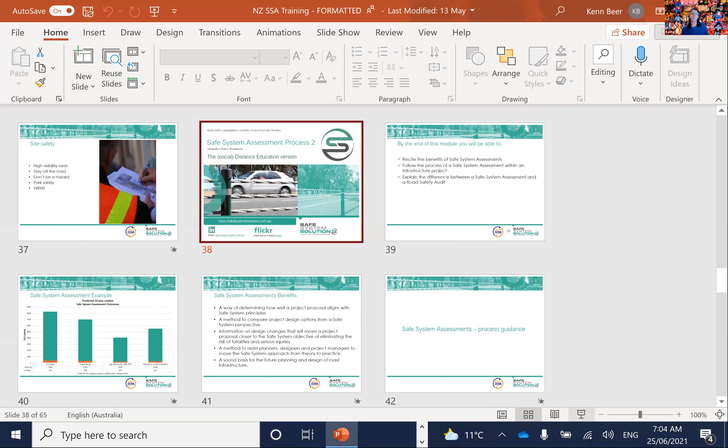Thanks, Kathy. So I will get started. I suppose we've called this one sort of process two, associated with safe system assessment, but a little bit of policy guidance as well.

We're going to talk about the benefits of safe system assessment, some independent evaluations that have been done on a number of safe system assessments into how effective they are. So I'll take you through that.

Generally, safe system assessments within an infrastructure project, and I'll explain the process that industry seems to have adopted, and a bit more on the difference between road safety audits and safe system assessments, because that's a very common question people ask: why do I need to do this? We do road safety audits as part of the project, or we're going to. What's the difference? Why is there any use?

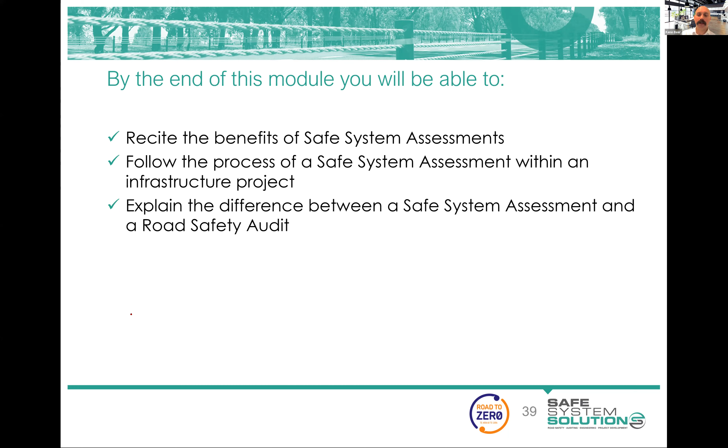I actually want to start with this diagram. There's a lot in this, so I'm going to spend a bit of time on it.

This is a chart from an independent evaluation. Blair Turner, some of you might know, a New Zealander actually, was engaged to do an independent evaluation of the first 35 safe system assessments undertaken in Victoria on major infrastructure projects. These are really big infrastructure projects - we're talking town bypasses, major freeway upgrades, really big stuff. So 35 of those.

What we did was basically use a crash prediction model. Crash prediction models being things like ANRAM, IRAP, IRR, or the like - they take the attributes of a road, relate those to research knowledge, take the crash history of the road, pack that in there, and are able to predict fatal serious injuries going forward based on alterations to that.

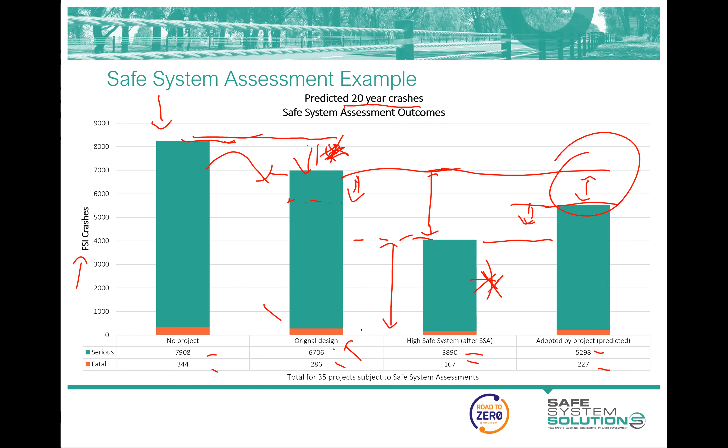We've got another question, Ken. Is there any cost-benefit comparison about this study? That's a really great question, because cost wasn't really looked into in this study, although I suppose it could be done. There were a couple of interesting examples when I looked at the 35 cases evaluated. Some were from Safe System Solutions, some from other consultancies, and a few done internally within different Victorian government departments. My take is that most of them had extra cost for the project, but it was small, not huge differences in cost. A few had lower costs while getting better alignment with safe system principles.

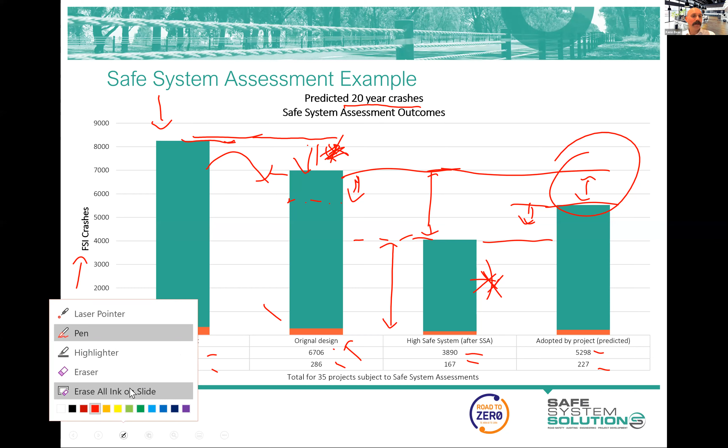One stands out in my mind very clearly, which was a bypass of a town. Essentially their cross section involved a 12, 15 meter median, then a lane, a lane, a massive clear zone, and another lane—this was a sort of greenfield bypass. The sheer amount of land they were going to need to acquire, and the vegetation removal, was huge.

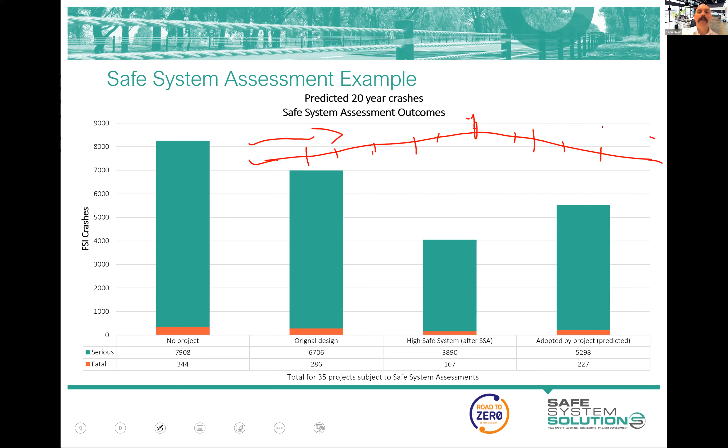And even just the earthworks and the cuts and things were big, and so this was because they were really going at that massive envelope. The safe system assessment said continuous barriers is going to be the go anyway, so you can bring everything in, barrier here, reasonable offset of 4.5 to 5 meters, and then your lanes brought everything in, and so you really narrowed the whole cross section, the land. I'd dare say it would save them many millions of dollars on that project to get better alignment.

So it's not always the case that it costs more money, but I will agree that in most cases to get from here down to here involved bits and pieces more - continuous barriers, maybe intersection forms that were a little bit bigger. But I don't have a dollar figure to that.

Other questions or comments, Ken? That's all for now, Ken. Thank you.

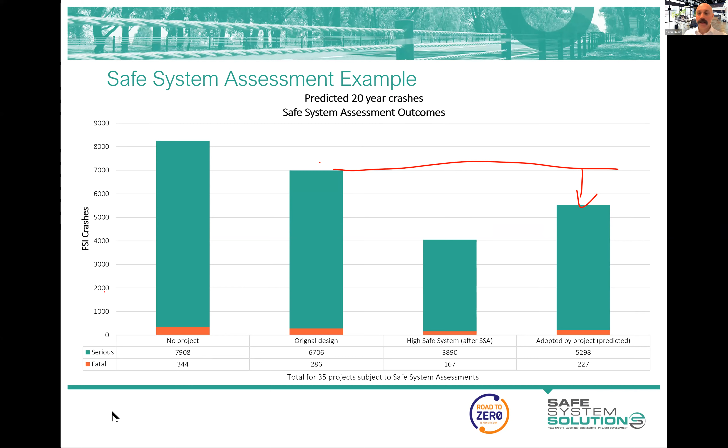Yeah, so I think that's something of interest, and there's certainly a couple of published papers on it if anybody needs to use that. It'll be interesting to collect a lot more. This was done about 4 years ago now on some early projects. It'd be interesting to see that after some time rolling safe system assessments out in New Zealand.

All right, just a few dot points of benefits of safe system assessments. A great way of determining how well a project aligns with safe system principles, as you're discovering. Good method to compare design options.

That's something I really like, in the sense that a road safety audit was never that thing to compare project designs. You'd identify issues with each design, and sure, an auditor may sometimes help with opinions on which is better, or maybe that provides some information to project managers to help make decisions when they've got options on the table. But this is a really clear way of doing that with some scoring.

And it's very much something that looks quite impressive, in the sense that if their traffic modelling has been plonked on the table, the big juicy traffic modelling report with level of services and lots of numbers and things like that - that was often put down on the table, and there's almost no questioning of it. You go, well, that's what it said. I mean, yes, the traffic people might have a little bit of debate about specific little things here and there, but it was generally, that's what the traffic model said.

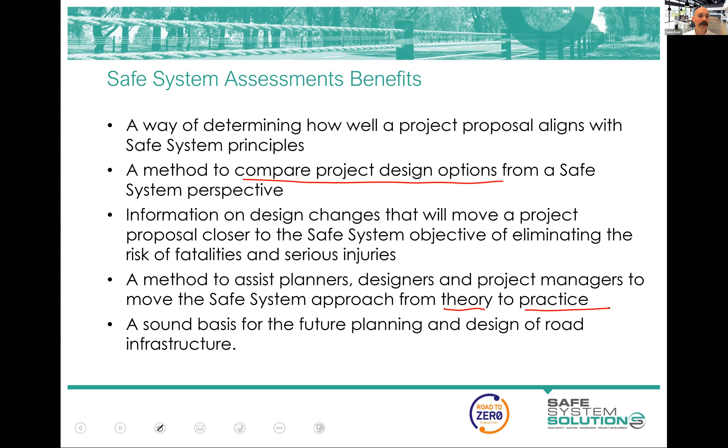Okay, so let's go through this process. You're managing an infrastructure project, and where are we going to be doing safe system assessments? This comes into sort of what was mentioned earlier - the safe system assessment is best done quite early in a project. I personally like to see some lines on paper and enough detail to understand what's happening, but the principles can be applied very early on.

Once you are into the details of a project, though, like you've got a detailed design, the safe system assessment isn't the greatest tool. It still scores, and you do your scoring, you can show how good things will be - that can be an advantage. But when you're starting to make recommendations on fundamental intersection form and big decisions that were made back earlier, you've got no hope of making these big changes. You're locked in. The project's locked in.

We have done safe system assessments on the big 500-page design set with the full works - drainage, plans, lighting - and then made recommendations that the intersection forms should be completely changed. And you think they were changed? Of course they weren't changed. They wanted to get this out to contract and were told that they had to do a safe system assessment, and they did not want any of that.

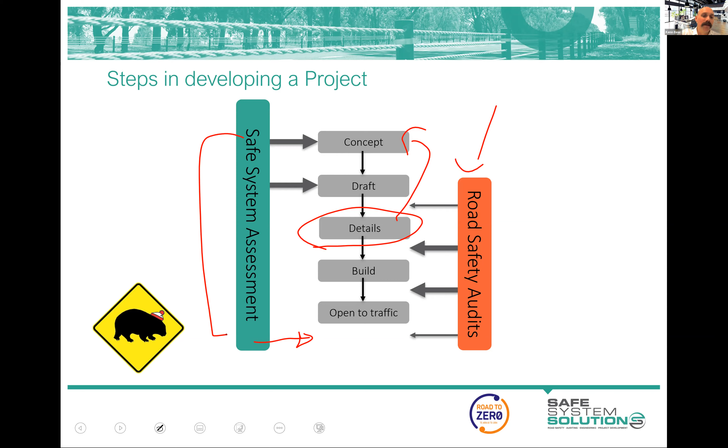The few differences between a road safety audit and a safe system assessment - and this is evolving over time - both of them look at issues that impact the likelihood of crashes and do them really well. Issues that identify the severity of crashes, I would say road safety audits should always, and it's certainly part of what is required. The New Zealand process guidelines for road safety audits talk about severity.

A little interesting quirk on New Zealand's process is you talk about the likelihood of severe crashes, so you have to get your head around that, because it's likelihood by likelihood - the likelihood of the crash happening and likelihood of it resulting in death or serious injury on the other axis, which is your risk matrix used in road safety audits. It's fine, but it is saying severity is important. But what we often find is that auditors in practice are sort of ignoring a high energy crash because the likelihood has been reduced to what in their mind is acceptable, if that makes sense.

The absolute classic is the signalized intersection, where the auditor is talking all about sight lines to the signals, the use of LEDs, whether mast arms are required, line marking, advanced warning signage, and everything like that - all great, important stuff, but sort of ignoring the fact, subconsciously I would say, that when that red light is run and a crash happens, the severity of that crash is going to be bad. But I'm hoping at some point soon we'll be able to give that a tick as well.

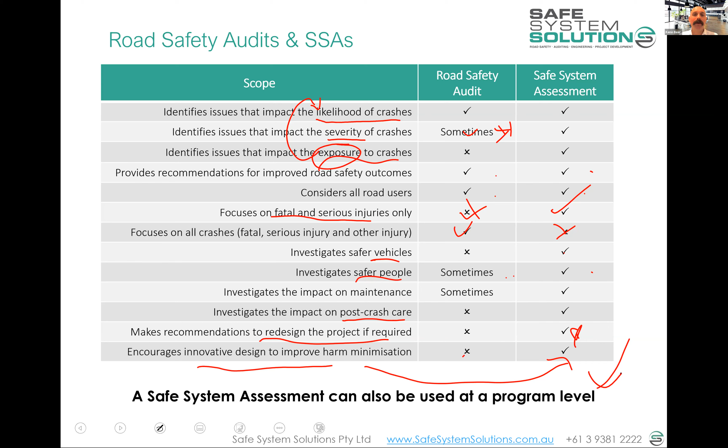It is an elaborate risk assessment methodology. Well, maybe not even elaborate - it's just a risk assessment methodology. Some questions and comments, please.

So Mark says, thinking about comparing designs, we very often have to compare against several objectives, and safety being one of them. So you can see how safety does get diluted throughout the process. Yeah, yes, and I think we're always going to fight that. I, of course, see the world only through a road safety lens. That's all I do.

But I do acknowledge that there's people who only see the world through an environmental lens, or only see the world through a traffic operations lens, and so we do have to be aware of that, and we're going to continue into the future to do multi-criteria assessments of infrastructure projects, and our funders are going to holistically look at the benefits of projects all round. But this does give us a pretty good tool as we go into that debate and challenge.

And I think just the way it's laid out means that safety hopefully goes up a few notches in its consideration. But we've got to be realistic here - it will be one of the considerations. It should be safety first, and then we'll work out the rest of it. But likewise, my environmental friends will say protection of the environment is first, and then everything else can come in under.

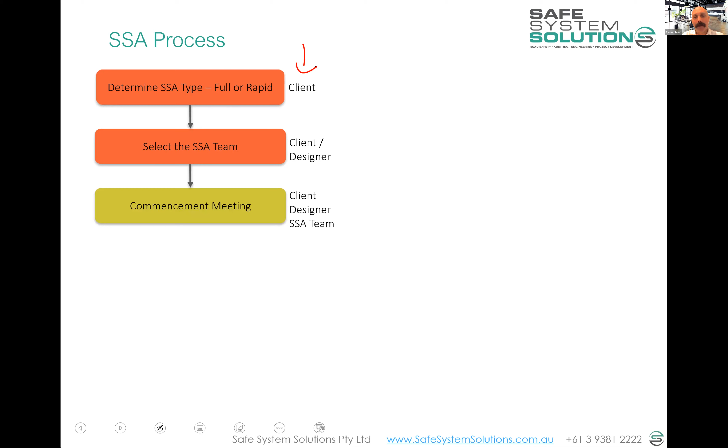Then there's some sort of commencement meeting with the design team and the safe system assessment team. That commencement meeting is really about understanding the project, the context, and the way things are going to be done, and that feeds into those recommendations and getting them aligned with what they're trying to achieve out of this project.

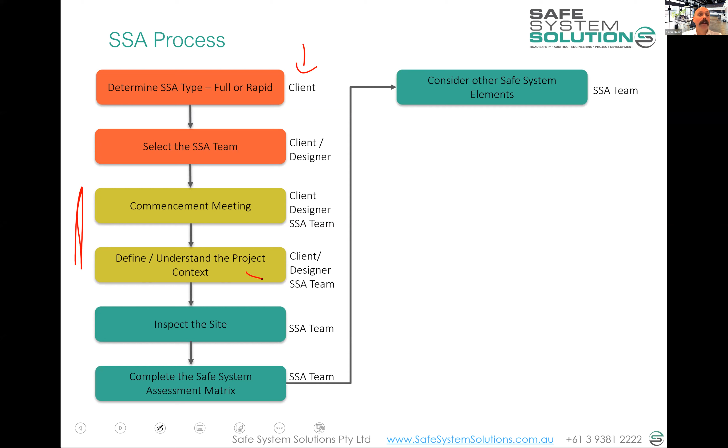There's a look at the plans and the designs, and then there's a site inspection. Completion of the safe system assessment matrix. Consider the other elements of the safe system, through the prompt questions and anything else you might think of. Identify treatments to improve alignment with safe system principles based on the existing design. And then you write up the report using some templates that are available.

That's handed over, and the clients then go through those recommendations and respond to them: yes, we can do this one; we can't do this one; this one's interesting, we like the idea but we're going to alter this bit, whatever they're saying. That doesn't need to come back to the safe system assessors, but it's a nice thing to do. And then the design is amended and these changes are incorporated into the project.

Now, if there's no intention to do any of this, then really you've got to question why a safe system assessment is actually happening. Maybe it's just to see which of the existing options has best alignment, but even still, you want to be able to take the best one, or whichever one you end up with, and understand how you can make it better.

So we really do want to see some change happening with this. And if not, it's starting to drift into tick box territory, and we don't want to waste the resources and energy on that. I'll be very disappointed if it becomes another tick box exercise.

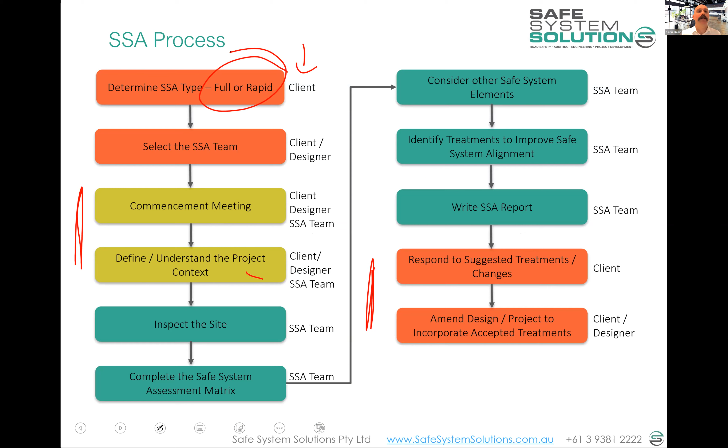Thanks, Ken. We don't have any questions on the process at the moment, but we have a question about crashes. Is there a separate assessment of national statistics of contributing factors to fatal serious injury crashes, or is it sourced from the police and coroner reports?

So there's quite a lot going on in that space. A huge amount of research goes into that, and you've got some wonderful research organisations in New Zealand working on that sort of stuff. You've got great human factors people doing research continuously, universities and the like, constantly putting out reports that look into these factors.

There are naturalistic driving studies, which essentially involve fitting cameras in cars and letting people drive the streets, gathering intel on factors often associated with behaviour involved in crashes. We've also got a lot of vehicle research, analysing the types of vehicles involved in crashes, going historically through databases and VIN numbers, and comparing that to safety features and those sorts of things. There's continual work happening around understanding speed, speed limits, and operating speeds on roads and how that influences crashes.

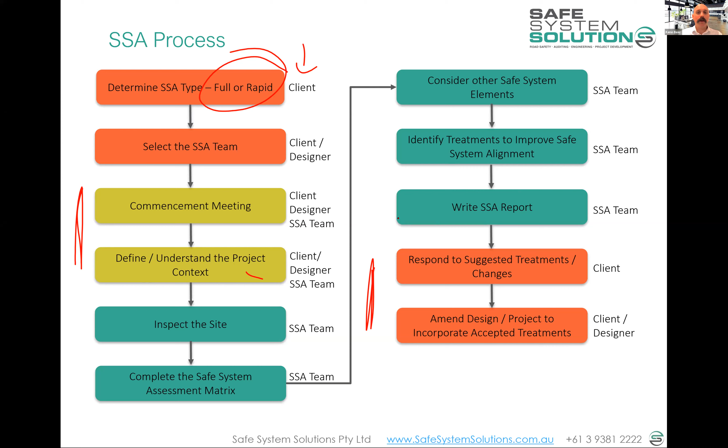Just to point you at what's happening in some other jurisdictions, I'll start with Victoria. The Safe System Engineering team in the Victorian government has produced quite a few resources - the guidelines we provided follow the Austroads procedure but add more detail and clarify a few things. The rapid and full safe system assessment templates are available, and those are what people tend to follow.

What I gave you as your template was the rapid one, but the Victorian government said please use these, rebrand them, copy everything - just try and get a bit of consistency in what's being produced, which I think is a great thing.

The Victorian government also publishes a list of recommended safe system assessors, and this is the pathway for getting onto that list. You show an interest in this sort of work, complete a course, get some real world experience, and then submit a safe system assessment which gets reviewed - either you get put on the list or they give you feedback and you can have another go or resubmit.

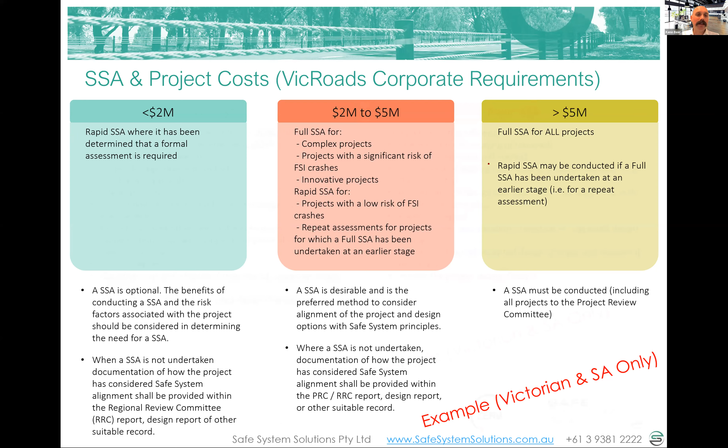I'll now cover what's in a full safe system assessment versus a rapid safe system assessment, then take some questions. Queensland calls the rapid a 'light' assessment - I think they spell it light, not lite. It's called rapid in Victoria and South Australia. A full safe system assessment includes the commencement meeting, the background and context, and the workshop.

It's said optional there—that's where you're in the room with, or online with, the project team and the designers, talking about why they've done different things. The reason it's optional is because some projects are quite clean cut, or the assessors know the context of the project quite well.

So anyway: site inspection, existing conditions matrix, then all the design options get their own matrix, just as you're doing in yours. Other safe system elements, design changes are recommended, then the full reporting, and then obviously they take on any changes they can, and rescore if necessary.

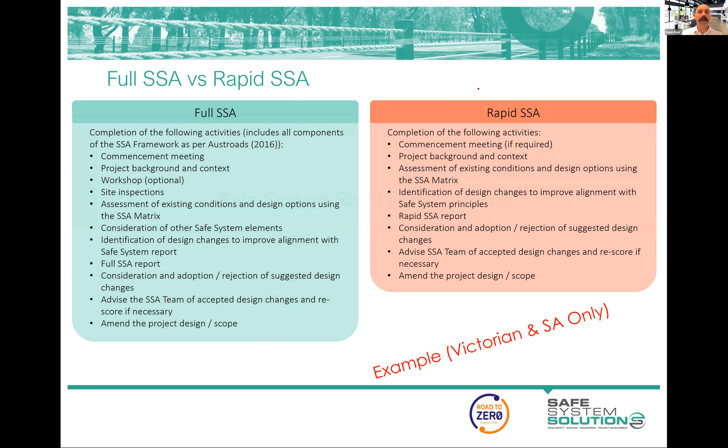So any questions or comments before I jump into some different road stereotypes, road environments? Shall we have a chat about that?

Yes, thank you, Ken. Lots of good thinking happening with this group. So the safety and health outcomes, such as physical inactivity and vehicle emissions of transport projects, both impact on disability adjusted life years. Is there any framework for assessing health and safety at the same time?

Not that I am aware of. Important stuff, but I don't know enough about that. I would hazard a guess there's lots of people who have different tools and models to assess some of this stuff—I just don't know of it. I'll be welcoming anybody else in the group to jump in and let us know of anything in that space. Sorry, I'm not much help there.

All good. Can you tell us about whether the VicRoads SSA and project cost criteria meets the Waka Kotahi funding requirements? Might need some more information about that one. Hold on—funding rules in New Zealand require an RSA to be completed at all stages of a project, or an exemption provided. Yeah.

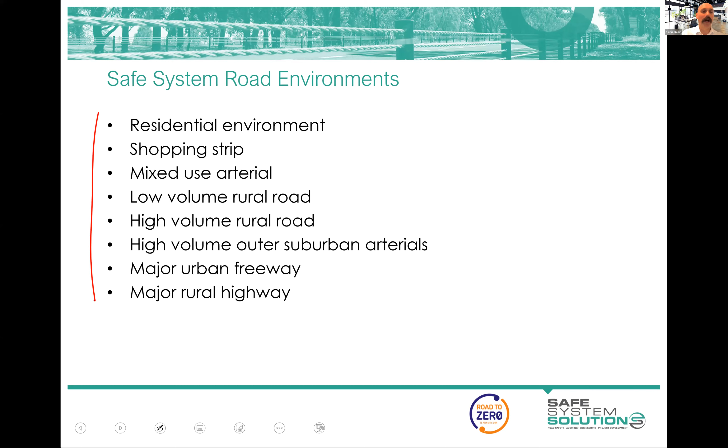Now type in a few ideas on things you can alter in the road environment to improve alignment with safe system principles. And like always, tell us whether they'll influence exposure, likelihood, and/or severity. I'll give you a second to do that.

I'm just going to jot down a couple of ideas, and the first people to put in these ideas win a prize. Not to say they're the only things or the best things, just a few I'm going to jot down. Because I realised I hadn't given out any prizes yet today, Kathy.

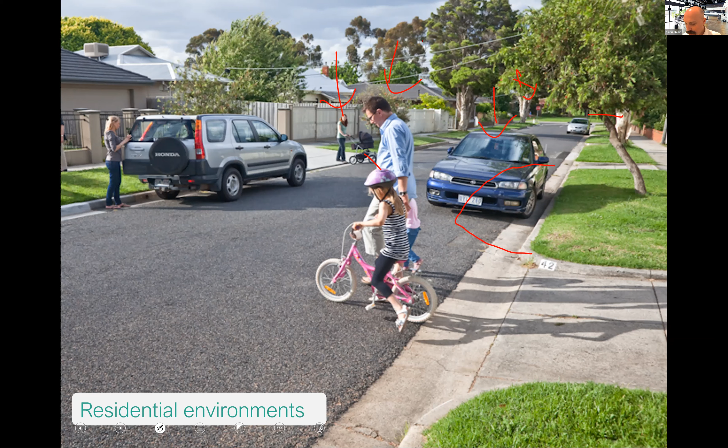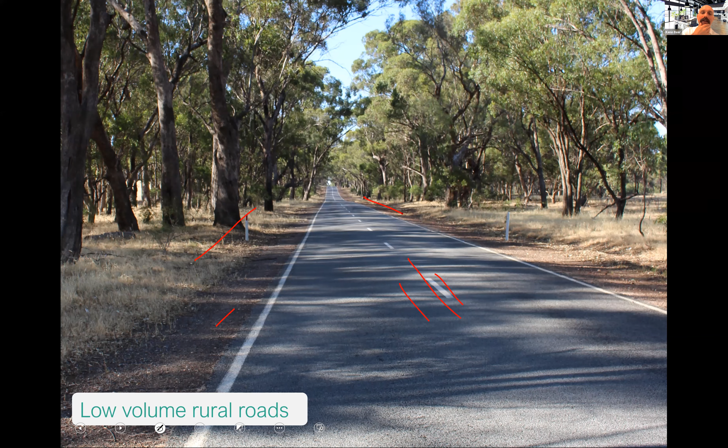But things like point-to-point speed cameras, mobile point-to-point, so at least keeping people within a lower speed, so lowering the likelihood. You can't say it's going to do a huge amount for severity, maybe on a few crashes, but the difference between sort of 110 and 100 here, the severity is still going to be a 4 coming out of that anyway, for run-off road, for head-on, or the like. So really challenging road environments.

We move on from that to some higher volume rural roads, your State Highway 1, I think this is, maybe.

For these ones, we're looking to actually start to implement that full separation with a central barrier system and outer barrier systems in a continuous way, if we can. Where it's rolled out and how it's rolled out over time, there's a lot of detailed thinking to be done there.

There's more that obviously can continue to be done, but the severity of crash here is pretty much unaddressed, because the head-on risk is, when the head-ons happen, they're going to be high speed, high impact, same with run-off roads. We're seeing some wonderful upgrades of these sorts of roads across New Zealand with central barrier systems and outer barrier systems.

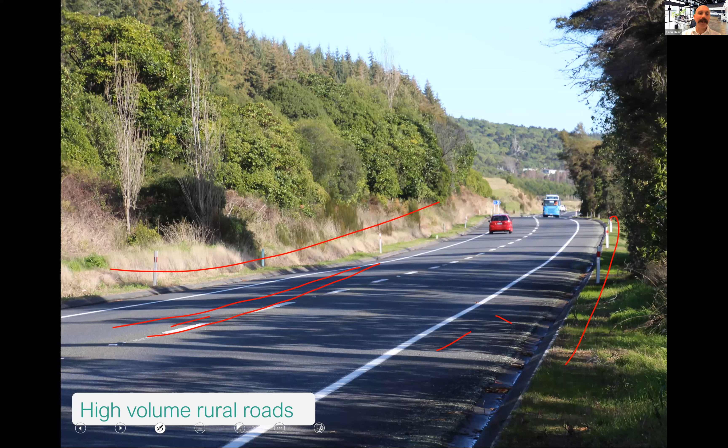When you get to the intersections on these roads, we've got to think about how we manage those. When you do a central barrier system, and if you can put a roundabout here, what you actually do is provide opportunity for accesses.

If there's an access point there, or further up, another 500 metres up, or a side road or the like, they can come out there. You could even provide them with some sort of acceleration lane into there. This is way up, but then a roundabout as their way to go back and do their U-turn around there.

So there's this beautiful theoretical way of doing continuous barrier systems and roundabouts, and you actually cover your whole length of your higher volume highway system in a really highly aligned, safe system manner, because you've eliminated the cross-traffic crashes, and you've put roundabouts as these U-turn locations. Now, that's sort of the theory.

And then when you get out there to try and do it, you've got, what distance is appropriate for somebody to travel the wrong way to get back the other way. And then also thinking about what type of U-turn facilities you can do if you can't afford the roundabout or it's inappropriate, and lots of different stuff going on there. I think there's currently a bit of work happening from WSP Opus, who are doing some work in New Zealand on different facilities to provide those U-turn opportunities. I sent a few different ideas over to them, or the different things that have been happening.

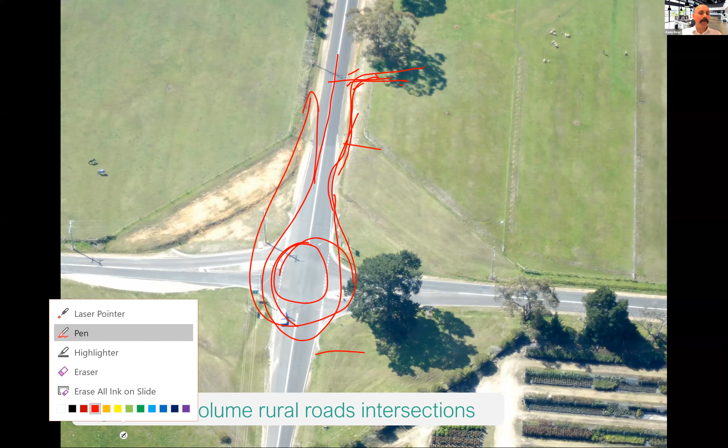And then all the good stuff at an intersection that is likelihood based as well: sight lines, lighting, splitter islands, offset. They all reduce the likelihood of crashes, but we do need to think about how we're going to address the severity at this location as well.

Kathy, questions, comments before I finish off with a couple more roads and then we have a general wrap up?

Thanks, Ken. You seem to favour narrow lanes for speed reduction over wider ones, which would appear to reduce runoff or head-on risk. How much is speed reduced?

No, it's not as much the speed reduction that I'm targeting with the narrower lanes. It's the separation. So you do get a little bit of speed reduction. Again, we did a little safe system snippet on this, so there's some research around the world just showing different lane widths and the road safety outcomes you expect.

A 3.5 metre lane is great in an area where you have appropriate separation or the like. Where the separation is just a white line, I will favour getting more separation and eating into some of the lane width, reducing the lane width to gather that separation. Ideally, keep your 3.5 and just move it all over, but you sometimes fall into non-full depth shoulders in terms of the pavement, so they will break up quickly. Sometimes you're into unsealed shoulders and those sorts of things as well.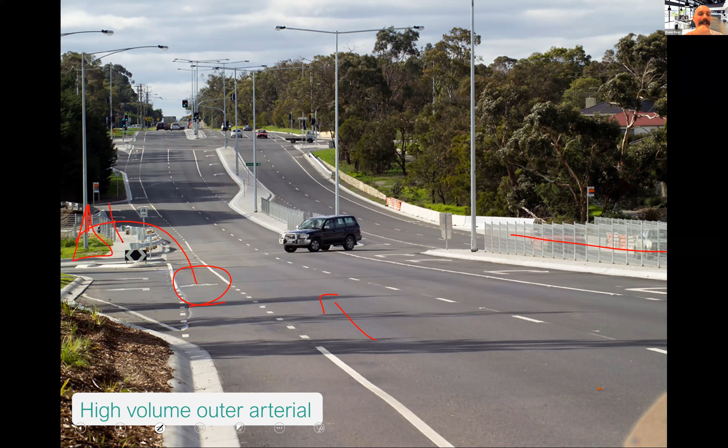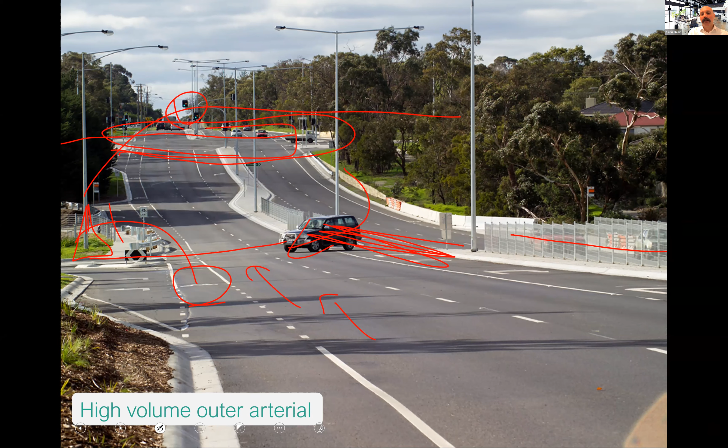These areas start to fall into the movement categorization. You can restrict access here, so pedestrian fencing can be appropriate, but you want to provide dedicated facilities for crossing, still thinking about energy at intersections and crossing points. You might look at overpasses or underpasses for pedestrians. You need to think about speed at any entries - can we close off these gaps and have people find a safer way, since there's still potential for high energy crashes? Signalizing reduces the likelihood, but we still need to think about the energy involved.

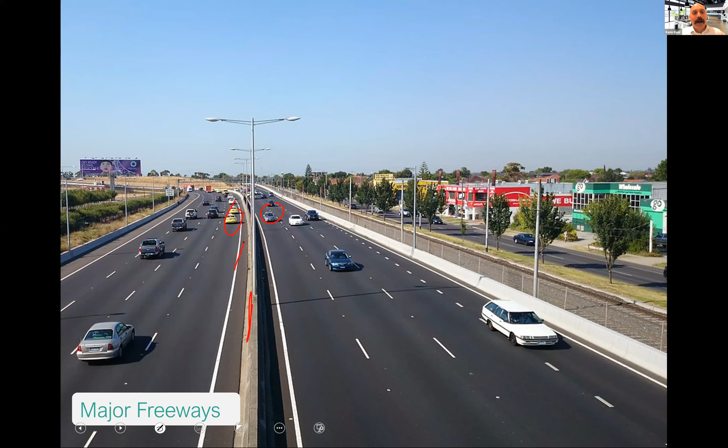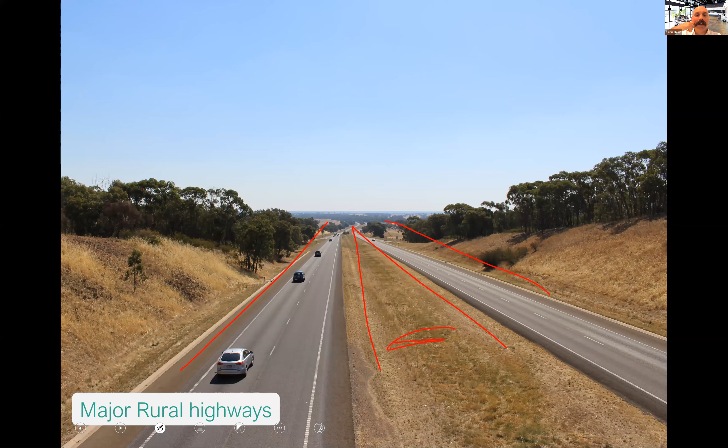And again, managing speed and angles at intersections - if you've got an intersection there, look at the idea of blocking off large acceleration areas long enough to get up to speed, so the delta V between the through vehicle and the entering vehicle is very low. Then enough distance that they can get to a U-turn facility, and another acceleration back in with the same idea.

So that takes space, but on these long routes you have that kind of space available to you. So a bit of that sort of thinking as well. But on overpasses, we can continue that without exposure to that crash, or in the interim, maybe some rural intersection activated warning signs.

Okay, so skip through at the end there. I think we've just touched on quite a few. I'll take a couple of questions, then I'll summarize. I always think with this last module that it'll all finish nice and early, but time flies when you're having fun. Okay, any final questions or comments there, Kathy?